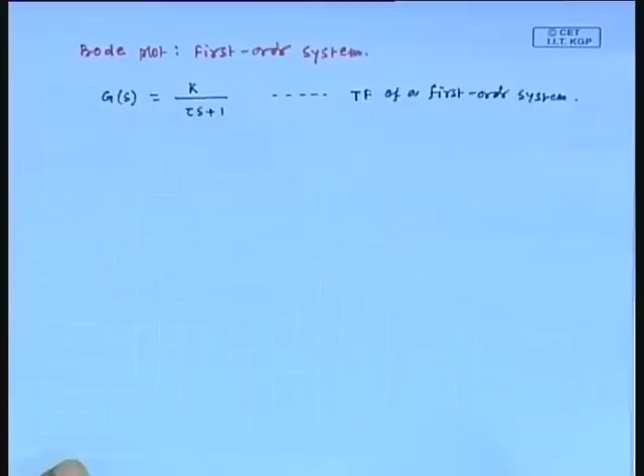Now, we obtained the expressions for amplitude ratio and phi in the previous class as amplitude ratio equals k divided by root over of 1 plus tau square omega square, and we obtained the expression for phase angle as phi equals tan inverse minus tau omega.

Now, we will take the logarithm of this amplitude ratio expression on both sides. Then we can write log amplitude ratio by k equals minus half log 1 plus tau square omega square. So, this is the magnitude ratio basically.

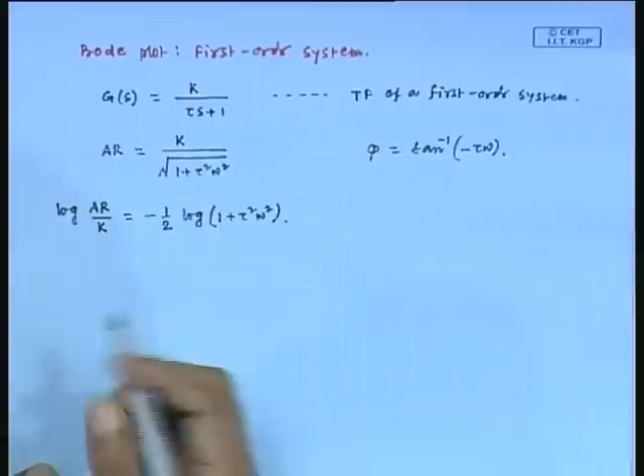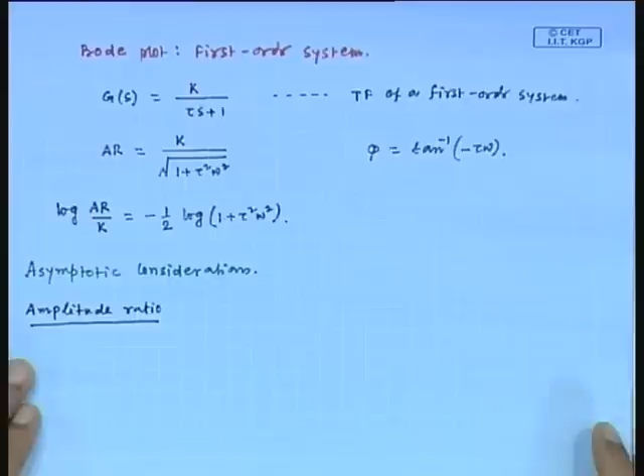Next, we will consider the asymptotic considerations. Before making the plot, we need to discuss the asymptotic considerations. First, we will consider the amplitude ratio, then we will discuss the phase angle.

Now, if we consider tau omega tends to 0, then amplitude ratio by k tends to 1. Here the amplitude ratio is multiplied with 1 by k, that means this is scaled amplitude ratio, and here we are considering scaled omega, I mean tau omega we are considering.

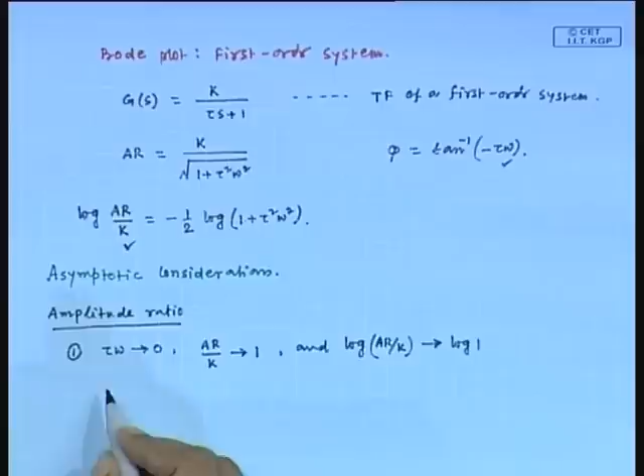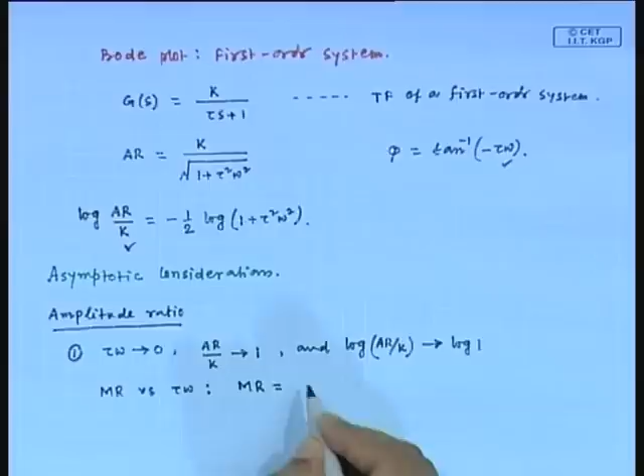So, we can write that log amplitude ratio by k tends to log 1. So, at the very low frequencies, the log plot of magnitude ratio versus tau omega tends to a horizontal line represented by magnitude ratio equals amplitude ratio by k equals 1.

Since this situation arises at low frequencies, this line is called low frequency asymptote.

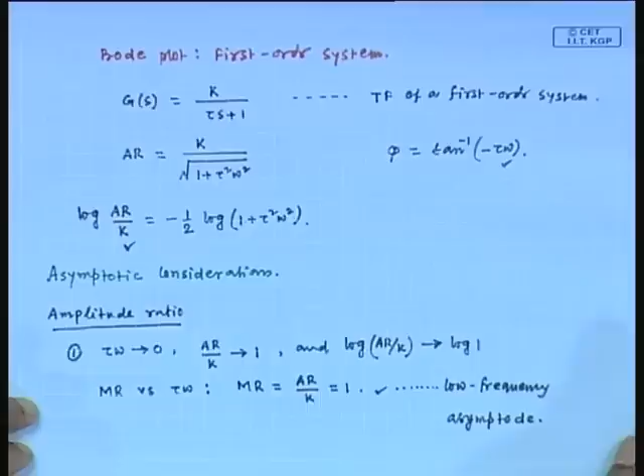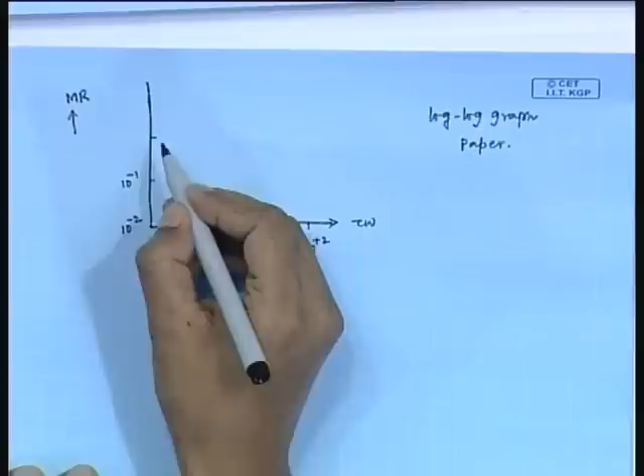This is 10 to the power minus 2, 10 to the power minus 1, 1, 10, and this is suppose 10 to the power plus 2. And here we are considering 10 to the power minus 2, 10 to the power minus 1, then suppose this is 1.

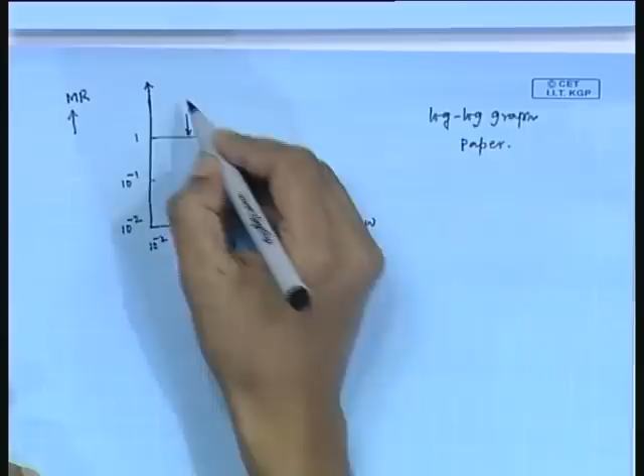Now, we obtained this form, log amplitude ratio by k approximately equal to log 1 when you consider low frequencies. That means it is clearly a horizontal line. So, this is the low frequency asymptote.

Now, under asymptotic consideration, next we will consider tau omega tends to infinity. As tau omega tends to infinity, then we can write log amplitude ratio by k tends to minus log tau omega.

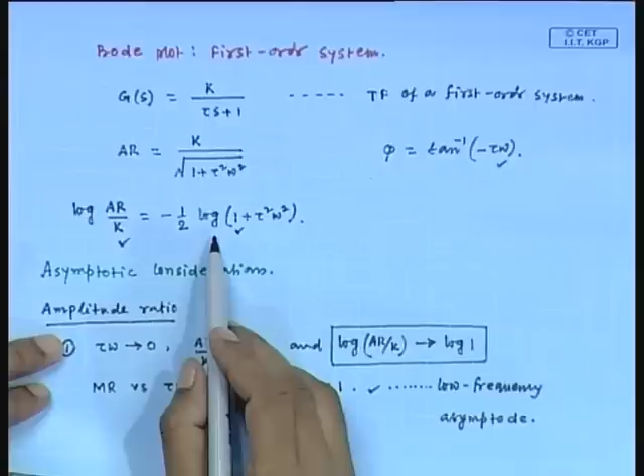When tau omega is much greater than 1, we can neglect this one term. I mean, this is the general form. When tau omega tends to infinity, we can neglect this 1. That means the right hand side becomes minus log tau omega. Agree?

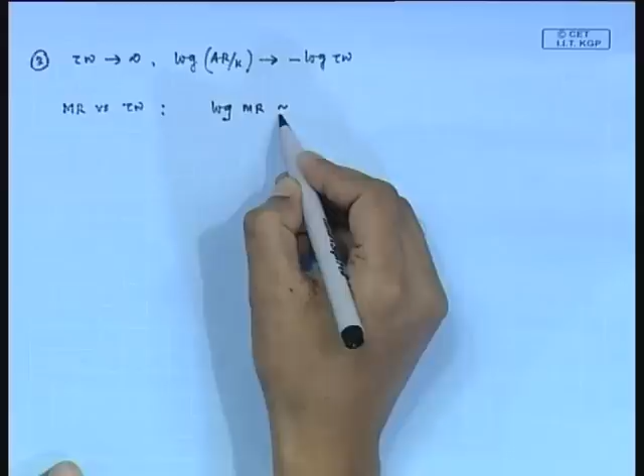So, when tau omega tends to infinity, we can write log amplitude ratio by k tends to minus log tau omega. So, the log plot of magnitude ratio versus tau omega tends to the line represented by log magnitude ratio approximately equal to minus log tau omega.

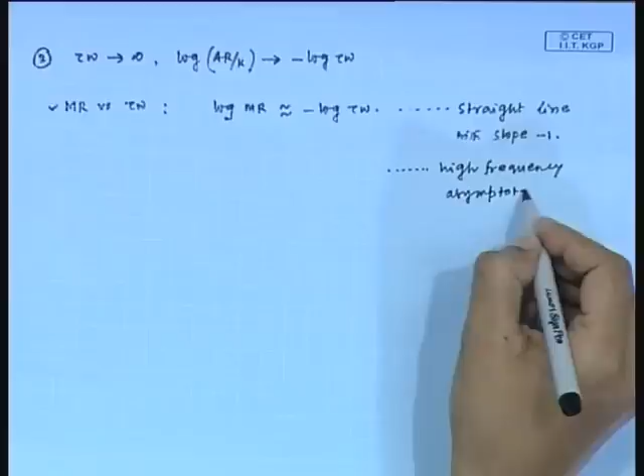This is nothing but a straight line with slope -1, and this situation arises at high frequencies. Therefore, this straight line is called the high frequency asymptote.

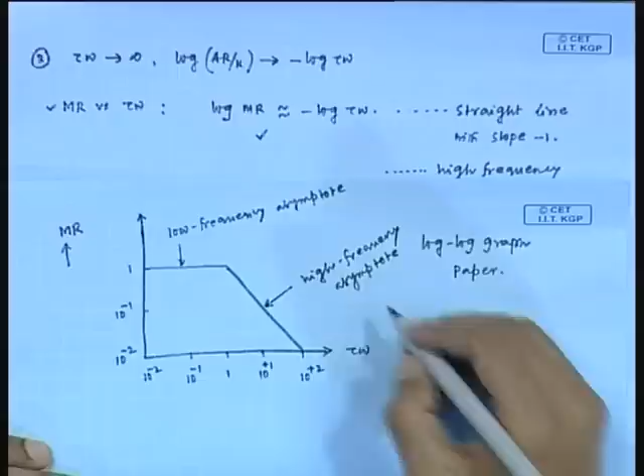So, we will next consider this equation in the Bode plot. It is basically a straight line with slope -1. So, this is representing the high frequency asymptote. It has a slope of -1.

In the next step, we need to determine the point of intersection. In the third step, we need to determine the point at which the two asymptotes intersect.

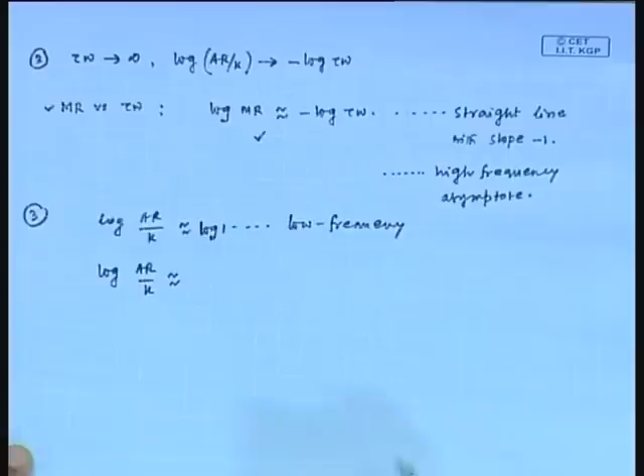When we consider tau omega tends to 0, we got log amplitude ratio by k is nearly equal to log 1. This we considered the low frequency asymptote. When we consider tau omega tends to infinity, we got log amplitude ratio by k, which is approximately equal to minus log tau omega.

Now, if we equate these two equations, we obtain tau omega equals 1. Agree? Equating these two equations, this one and this one, we obtain tau omega equals 1. That means they intersect at tau omega equals 1.

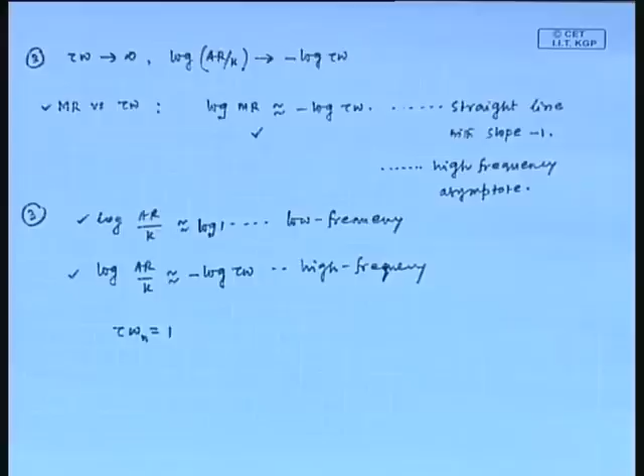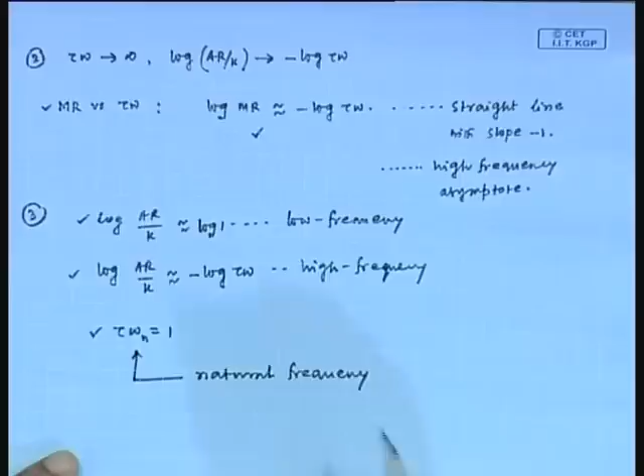Now, in this situation, we usually use one suffix for this omega, that is n. At this situation, we use the suffix n for omega, so we can write tau omega n equals 1. The value of omega at which these two asymptotes intersect is called the natural frequency. So, omega n is the natural frequency. Most popularly it is called the corner frequency, also called the break frequency.

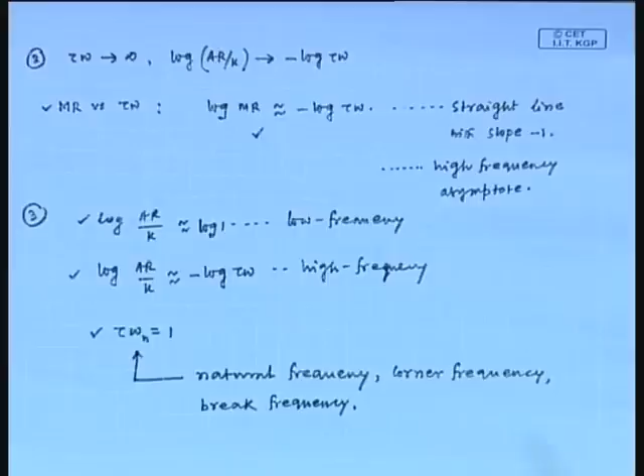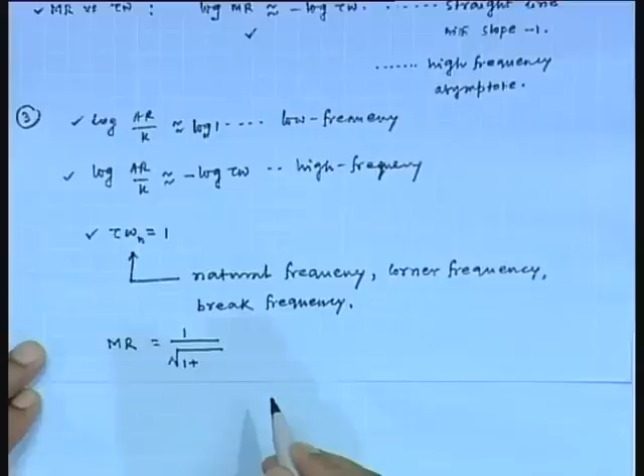Now, can we determine the exact value of the magnitude ratio at this corner frequency? We have the expression of magnitude ratio, that is magnitude ratio equals 1 divided by root over of 1 plus tau square omega square. So, this is the exact value of magnitude ratio at corner frequency.

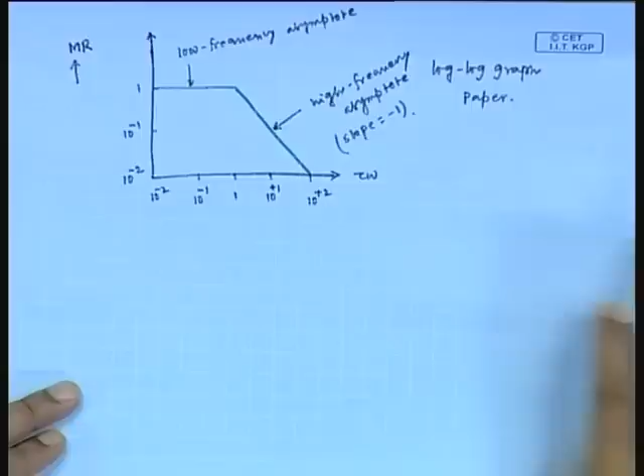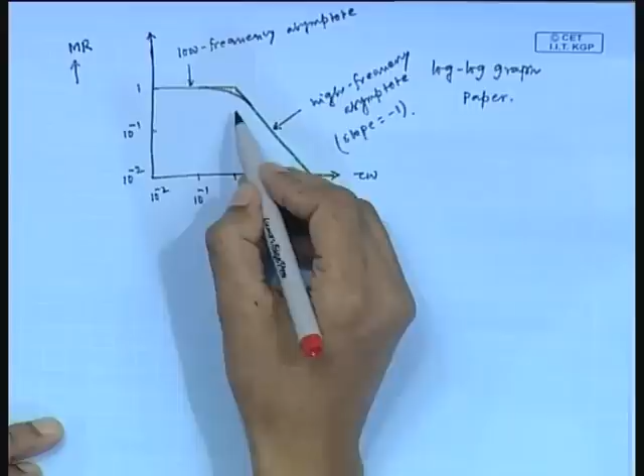Accordingly, we need to construct the Bode diagrams. This magnitude ratio versus tau omega plot should look like this, and the corresponding tau omega is 1 here, which is the corresponding natural frequency in this first plot. So, this is the asymptotic consideration in terms of amplitude ratio, and we obtained this plot.

Similarly, we need to consider the asymptotic consideration in terms of phase angle. So next we will consider the phase angle. As tau omega tends to 0, phi tends to what? 0.

In the second case, as tau omega tends to infinity, how much is phi? Minus 90, that means phi tends to minus 90. So, phi never goes less than minus 90. It clearly indicates that phi never be less than minus 90.

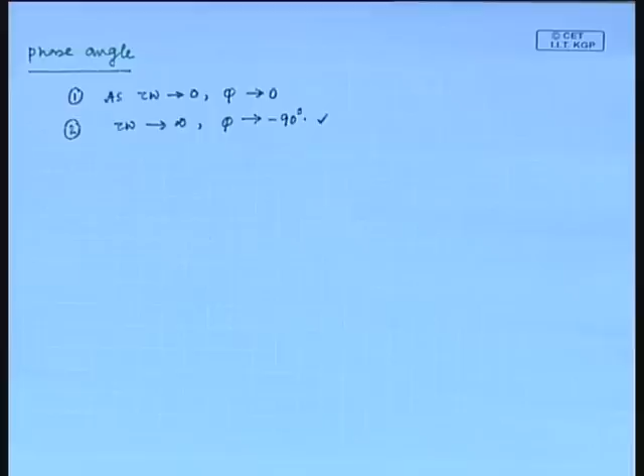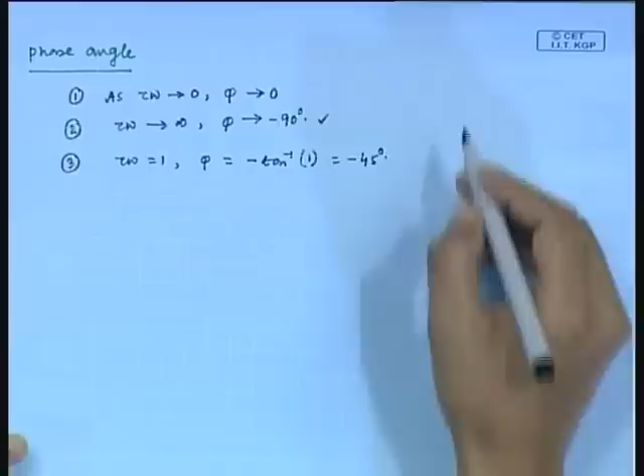And in the third situation, we will consider the corner frequency. At the corner frequency, that means tau omega equals 1, how much is phi? Phi is minus 45, minus tan inverse 1. So, this is minus 45. These are the asymptotic considerations in terms of phase angle.

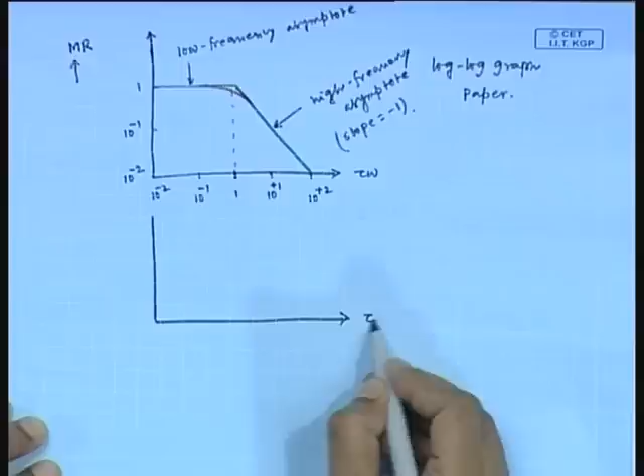Now, we will draw the phi versus log tau omega plot. This is the semi-log graph paper, and this is 1, which corresponds to the corner frequency: 10 to the power minus 2, 10 to the power minus 1, this is 10 to the power plus 1 and 10 to the power plus 2. This is, suppose, minus 100 degree, minus 90 degree, this is say minus 45 degree, this is say 0 degree.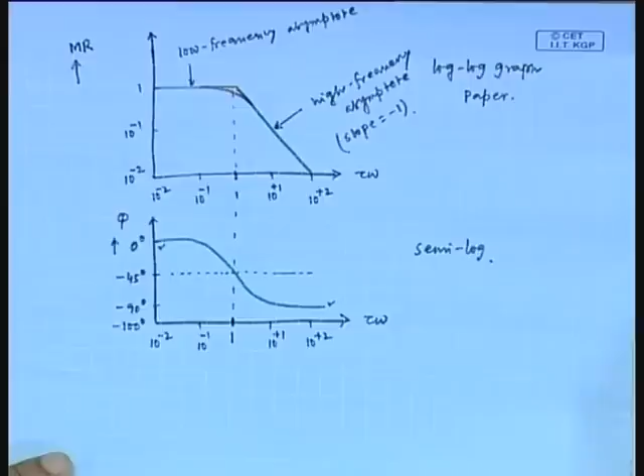At low frequencies, the phi is 0. So, it is somewhat like this. At low frequencies phi is 0, and when tau omega tends to infinity we obtain phi minus 90, and when tau omega equals 1 we obtain minus 45. Agree? At low frequencies this phi is near to 0, and as tau omega tends to infinity this is minus 90, and at corner frequency this is minus 45. So, this is the Bode plot for a first order system.

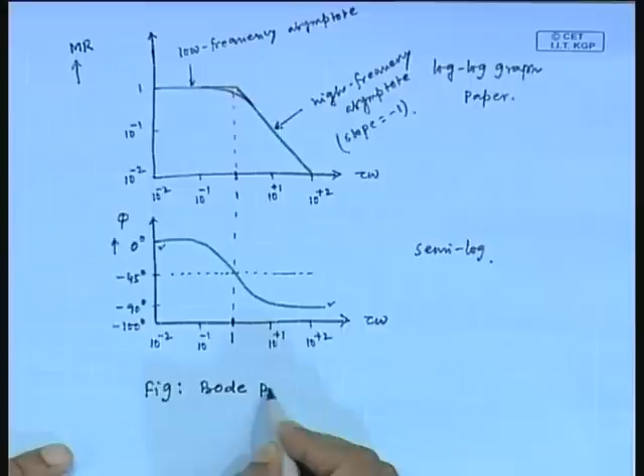This is the Bode plot of a first order system. Next we will discuss the construction of Bode plot for a second order system. In the next we will discuss the Bode plot of a second order system.

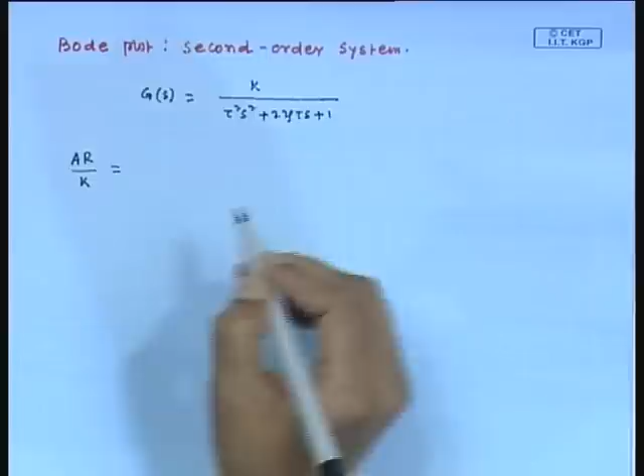So, the transfer function of a second order system we considered earlier takes this form: Gs equals k divided by tau square s square plus 2 zeta tau s plus 1. And in the last class we derived the expressions for amplitude ratio and phi. So amplitude ratio divided by k equals 1 divided by root over of 1 minus tau square omega square whole square plus 2 zeta tau omega whole square. This expression we derived earlier.

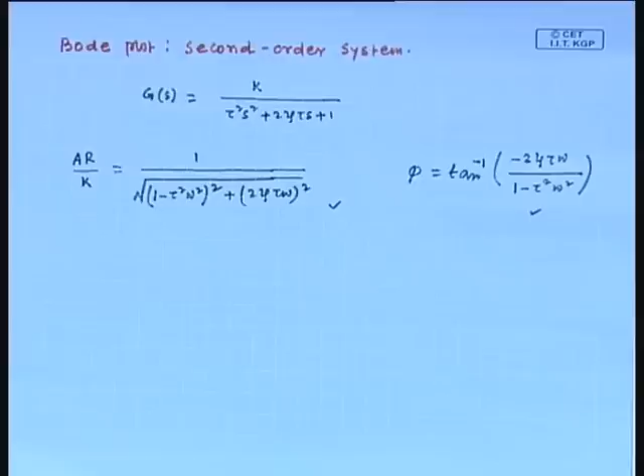Similarly, the expression of phi is written as tan inverse of minus 2 zeta tau omega divided by 1 minus tau square omega square. These two expressions we derived earlier. Now we will discuss the asymptotic considerations in terms of first amplitude ratio followed by phase angle.

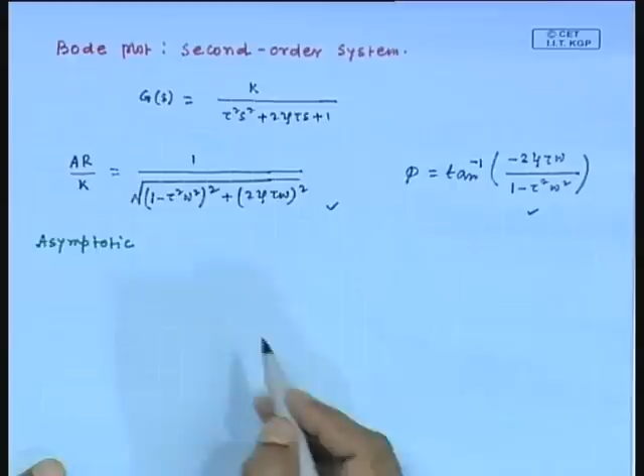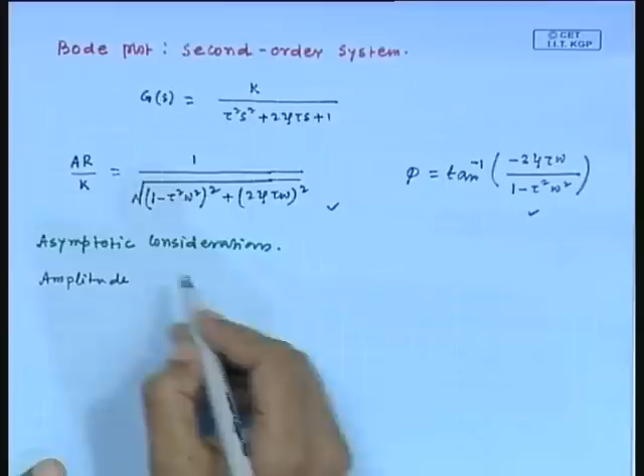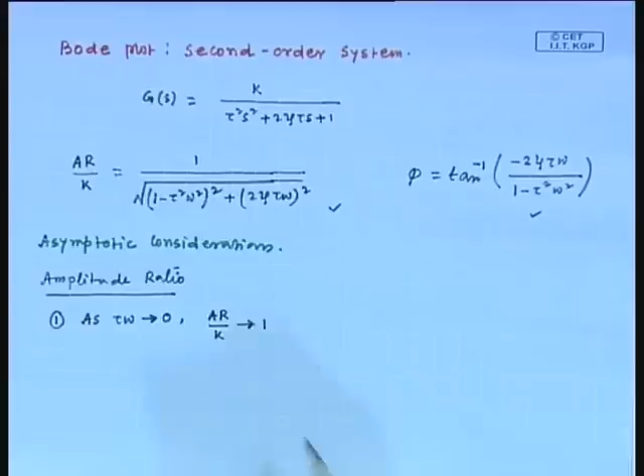Asymptotic considerations. First we will consider amplitude ratio. As tau omega tends to 0, amplitude ratio by k tends to 1, and log amplitude ratio by k tends to log 1. As tau omega tends to 0, we obtain amplitude ratio by k tends to 1, and accordingly log amplitude ratio by k tends to log 1.

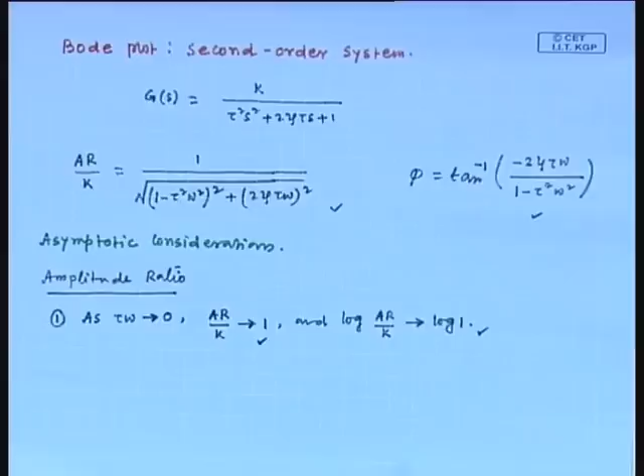Now, it is clear that the low frequency asymptote is a horizontal line. It clearly says that this is a horizontal line.

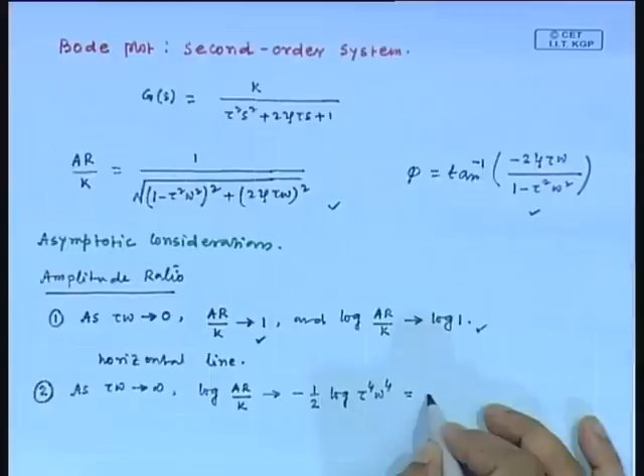Next we will consider tau omega tends to infinity. So, as tau omega tends to infinity, log amplitude ratio by k tends to minus half log tau to the power 4 omega to the power 4. Here we neglect all lower order terms. So, this is equal to basically minus 2 log tau omega. As we consider tau omega tends to infinity, we obtain log amplitude ratio by k tends to minus half log tau to the power 4 omega to the power 4, where all lower order terms have been neglected. So, it then becomes minus 2 log tau omega. So, this is a straight line with slope minus 2.

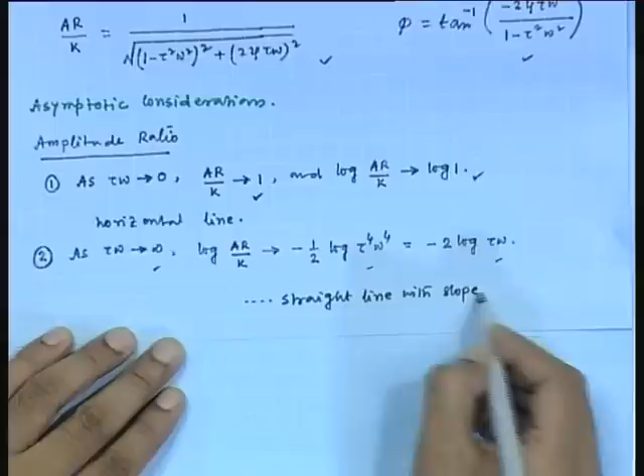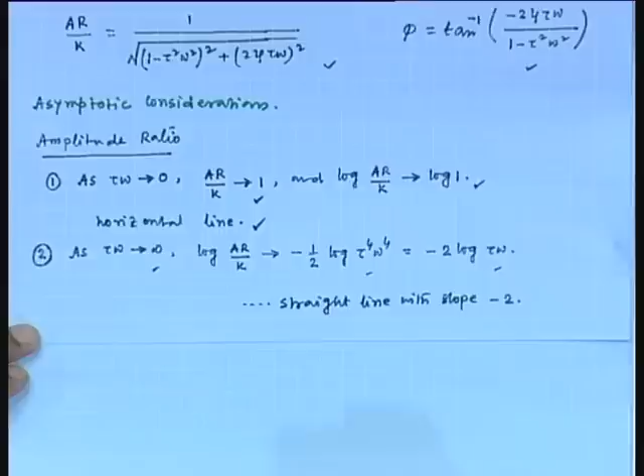So this is a straight line with slope minus 2. The low frequency asymptote is a horizontal line, and the high frequency asymptote is a straight line with slope minus 2. For the first order system, we obtained a horizontal line as low frequency asymptote, but the high frequency asymptote is a straight line with slope minus 1, and for second order system the slope is minus 2.

Now we can produce the plot of magnitude ratio versus tau omega. Before that, we need to determine the point of intersection. This is the third step.

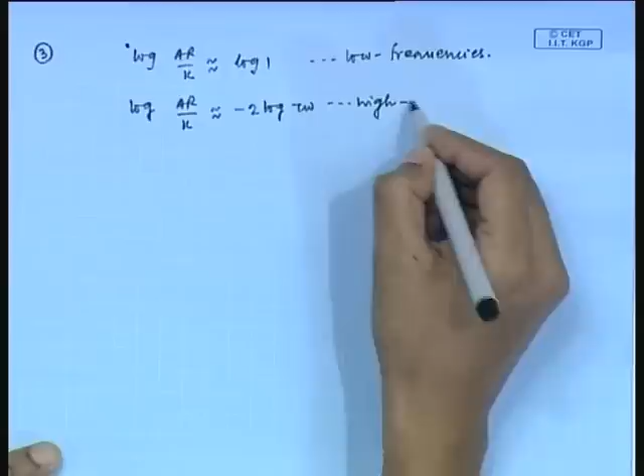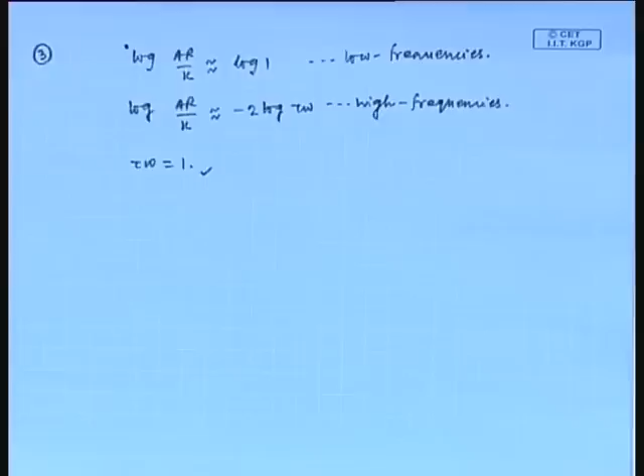So we got basically log amplitude ratio by k, which is approximately equal to log 1. This equation we obtain at low frequencies, and for high frequencies we obtain minus 2 log tau omega. Equating these two equations we obtain again tau omega equals 1. But here we cannot determine the exact values of magnitude ratio, because that is also a function of zeta. Here the exact value at corner frequency we can obtain only knowing the value of zeta.

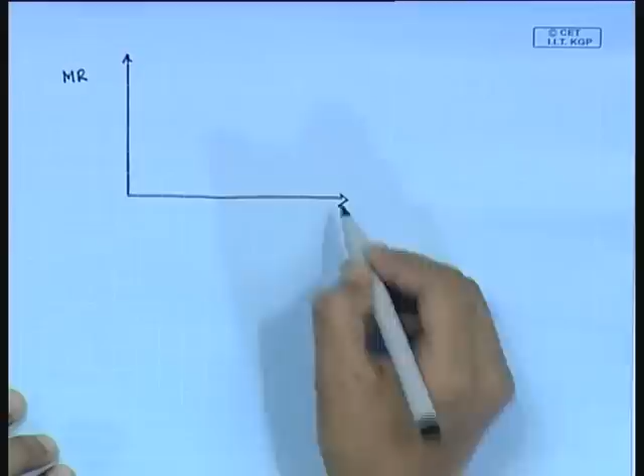So here the magnitude ratio can be obtained by knowing the value of zeta, and this should be reflected in the Bode plot. Next we will construct the Bode plot, and first we consider magnitude ratio versus tau omega.

Say this is 0.1, then 1, and this is 10. 0.01 is the starting value of magnitude ratio, next one is 1, and this is 100. So at low frequencies we obtained a horizontal line, and at high frequencies we obtained a straight line with slope minus 2.

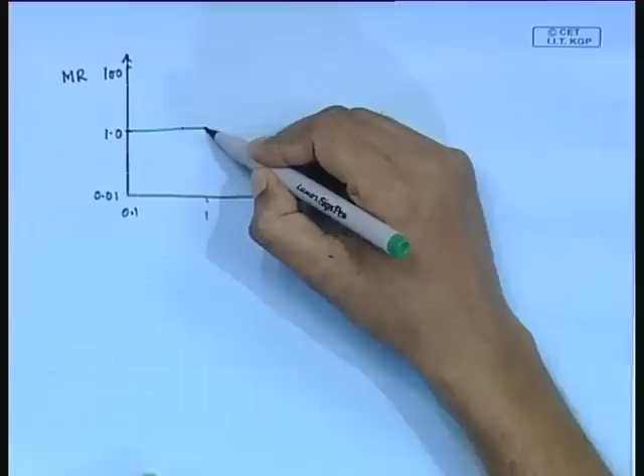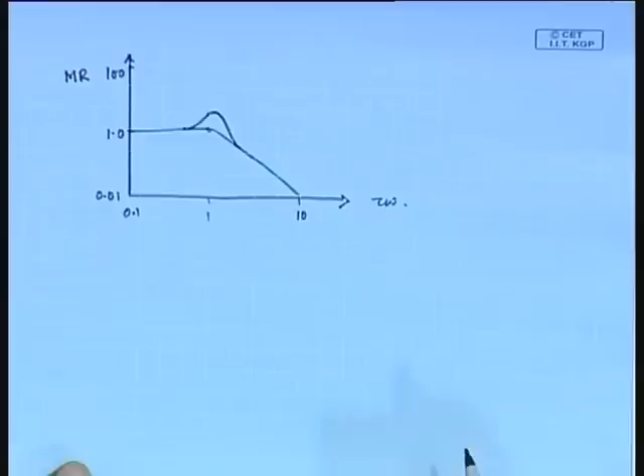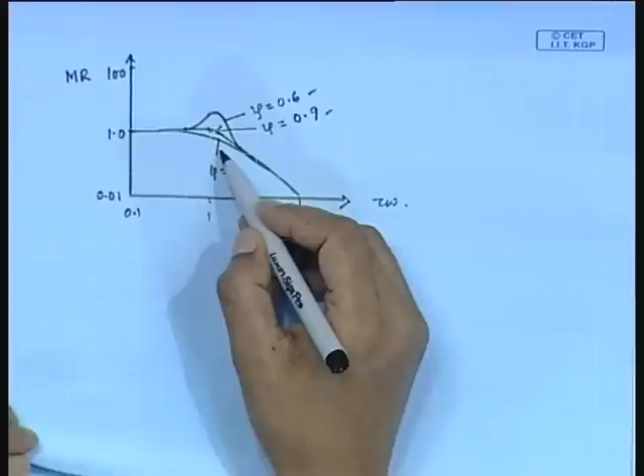It was mentioned that the magnitude ratio at the point of intersection depends on the value of zeta. So accordingly we will consider 3 different cases varying the zeta values. This type of response we obtain if zeta is say 0.6, which is quite less. This one we obtain when zeta is say 0.9, and this plot we obtained when zeta is 1. Considering 3 different values of zeta, we obtained 3 different plots of magnitude ratio versus tau omega. So these are the 3 plots. This top one corresponds to zeta equals 0.6, next one corresponds to zeta equals 0.9, and this bottommost one corresponds to zeta equals 1.

Next we will discuss the asymptotic considerations in terms of phase angle. When tau omega tends to 0, we can write phi equals tan inverse minus 2 zeta tau omega. Can we write this? This we can write when tau omega becomes much less than unity.

Now if we consider tau omega tends to 0, this phi approaches 0. If tau omega is much less than 1, we can write the phi expression like this, tan inverse minus 2 zeta tau omega. Now if we consider tau omega tends to 0, the phi approaches 0.

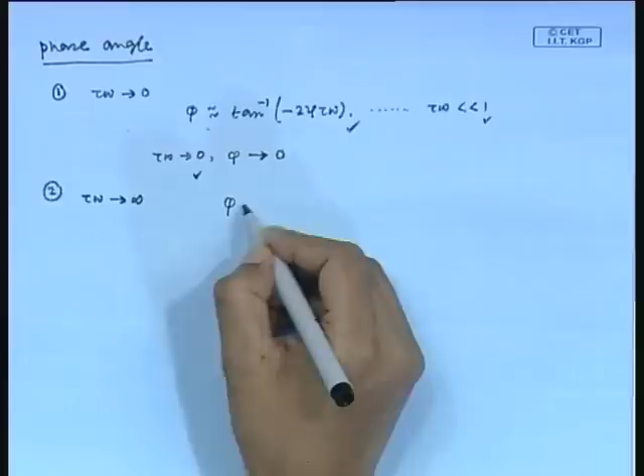Secondly, if we consider tau omega tends to infinity, in this case we can write the phi expression as tan inverse minus 2 zeta tau omega divided by 1 minus tau square omega square. This is the original expression. We can write this as tan inverse minus 2 zeta divided by 1 by tau omega minus tau omega. So this is equal to tan inverse 2 zeta by tau omega when we consider tau omega tends to infinity. So this one we can write in this form considering tau omega tends to infinity.

So then phi tends to tan inverse 2 zeta by tau omega, which is equal to tan inverse 0. This expression we got. Now we are considering tau omega tends to infinity, so we can write tan inverse 0, and this is equal to minus 180 degrees. This is considered as minus 180.

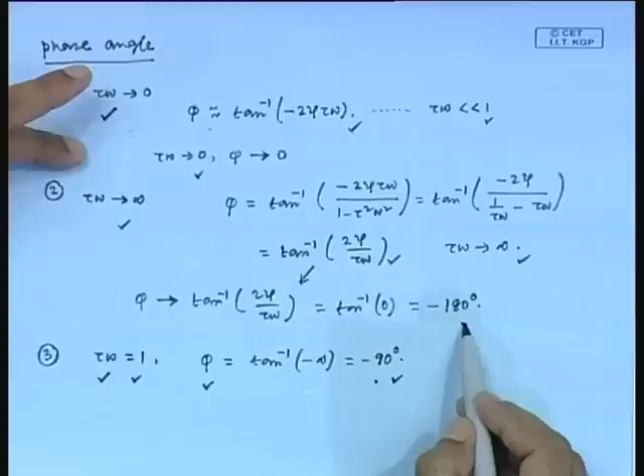Now you see, initially we consider tau omega tends to 0 and this is tau omega equals 1. So this is the lowest one, this is the intermediate one and this is the highest one. Here the phi value is maximum, this is intermediate and this is minimum. So there is a trend in the Bode plot.

Now we will try to produce the plot between phi versus tau omega. And this is phi: 0.1, this is indicating 1 and this is 10. This is suppose minus 200 degrees, minus 180 degrees, minus 90 degrees, 0 degrees. This plot also considers the different values of zeta. This is one plot.

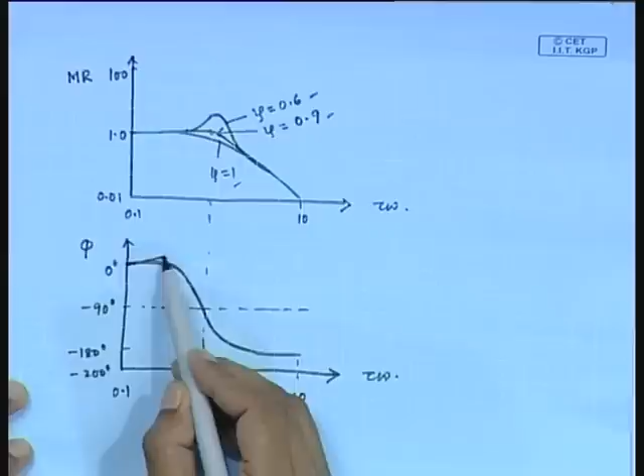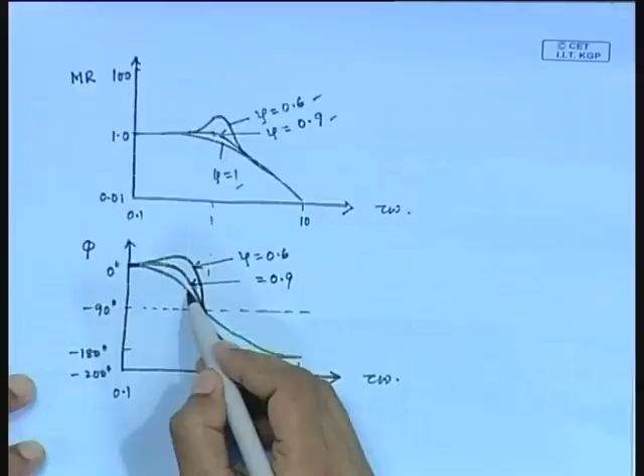This is the second plot, and this is the third plot. The top one we obtain for zeta 0.6. The intermediate one we obtain considering zeta 0.9, and this one we obtained considering zeta equals 1.

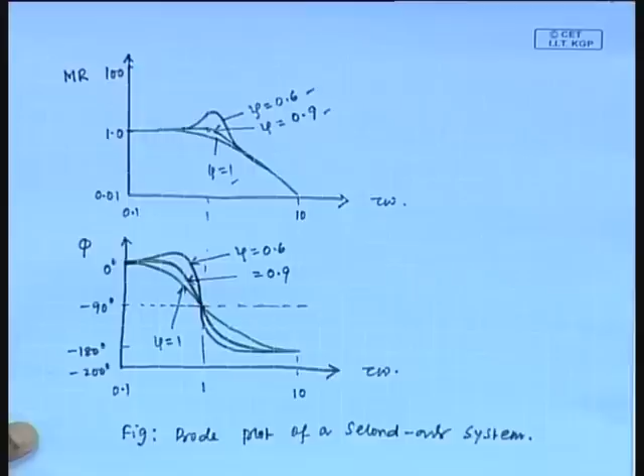So this is the Bode plot of a second order system. The top one is plotted using log graph paper, and the bottom one is obtained considering semi-log graph paper.

In the last example, we will consider a feedback control system, a feedback controller, and we will construct the Bode plot. So next we wish to discuss the construction of the Bode plot for a P only controller.

The transfer function of a P only controller is Gc equals Kc. So we can write amplitude ratio equals Kc, and the phase angle we can write as phi equals 0. So both are independent of omega, so it is easy to develop the Bode plot.

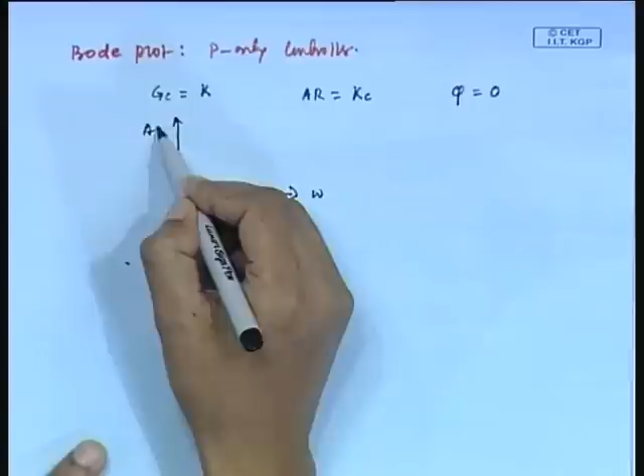This is indicating omega and this is indicating amplitude ratio. Since Kc is independent of omega, this should be a straight line. In the bottom plot, we consider phi versus omega, and phi remains 0 at all times - that is also a horizontal line having phi 0 degree. So this is the Bode plot of a P only controller.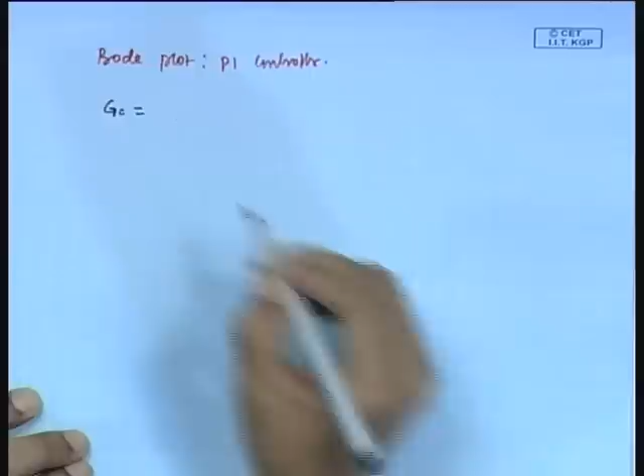Next is the PI controller. The PI controller has the transfer function and it can be written as Gc equals Kc times 1 plus 1 divided by tau I s.

Replacing S by j omega, we can write the frequency response transfer function as Kc multiplied by 1 plus 1 divided by j tau I omega. We can write this as Kc times 1 minus j divided by tau I omega. Agree?

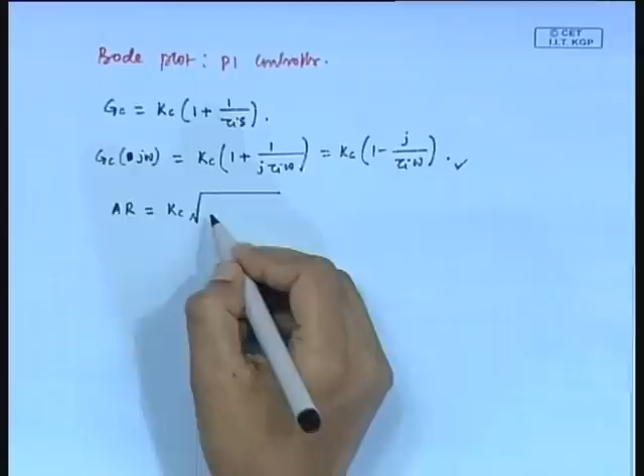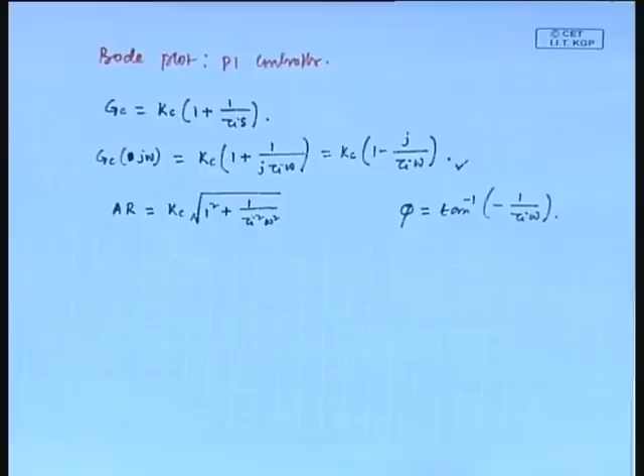So from this Cartesian form it is straightforward to determine the expressions for amplitude ratio and phi. Amplitude ratio we obtain as Kc times root over of 1 squared plus 1 divided by tau I squared omega squared. Similarly, we can write phi equals tan inverse of minus 1 divided by tau I omega.

Now we can write this expression for amplitude ratio by taking the logarithm as log of amplitude ratio by Kc equals half log of 1 plus 1 divided by tau I omega whole square, which is log amplitude ratio by Kc equals half log of 1 plus 1 divided by tau I squared omega squared.

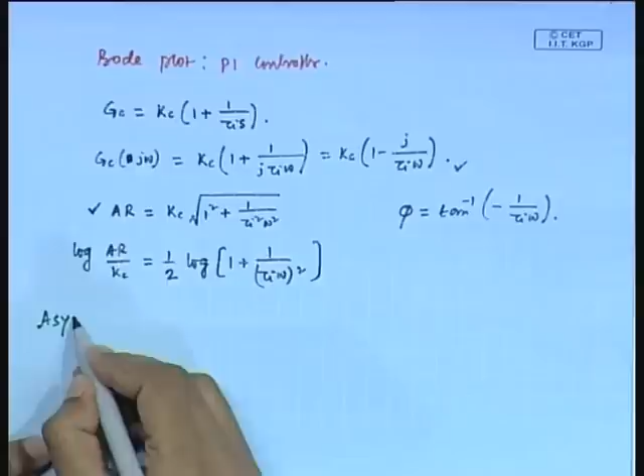Next we consider the asymptotic considerations. First we consider the amplitude ratio.

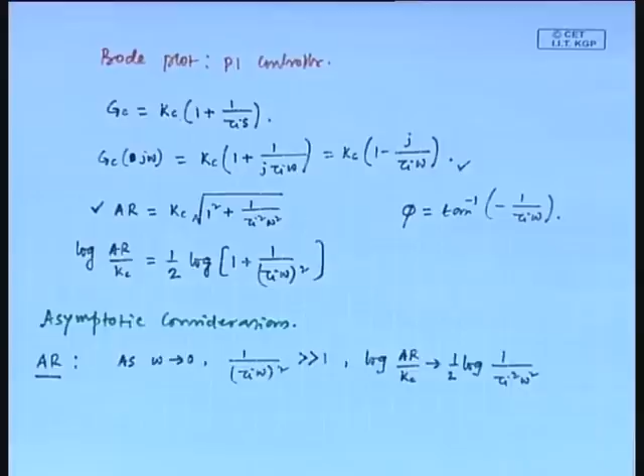As omega tends to 0, 1 by tau I omega whole square becomes much higher than 1. So we can write log amplitude ratio by Kc tends to half log of 1 by tau I squared omega squared, which is equal to minus log of tau I omega.

If we consider omega tends to 0, we can say that 1 by tau I squared omega squared is much higher than 1, then this expression yields this. So the low frequency asymptote is a straight line with slope minus 1.

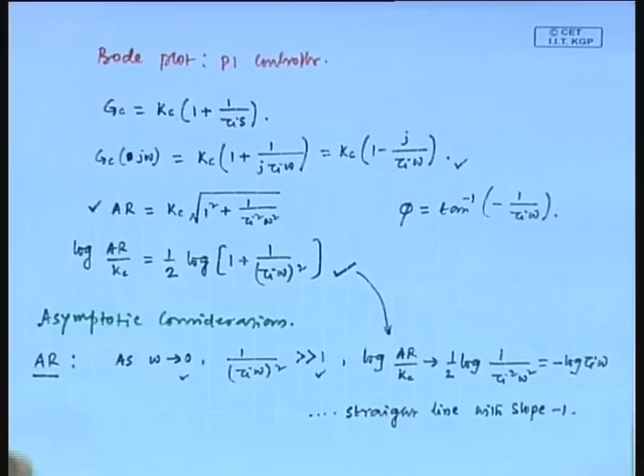So what will be phi then if we consider omega tends to 0? Phi becomes tan inverse of minus infinity, which is equal to minus 90 degrees.

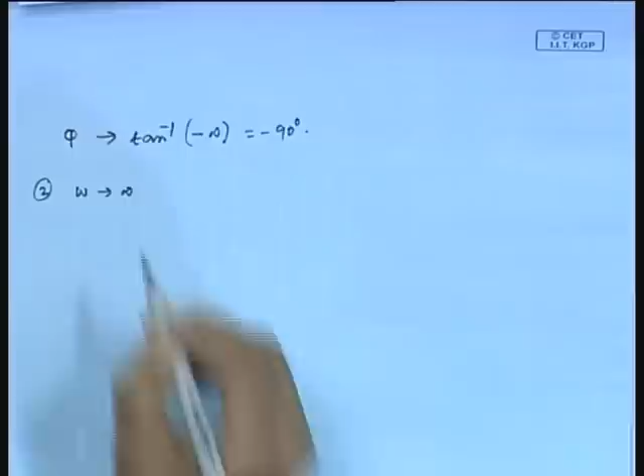It is very straightforward because we have this expression, we are just considering omega tends to 0. In the next step we will consider omega tends to infinity. Then 1 by tau I squared omega squared approaches 0. Accordingly, we can write log amplitude ratio by Kc tends to log 1. So at high frequency, the high frequency asymptote is a horizontal line.

High frequency asymptote is a horizontal line. And how much is phi if omega tends to infinity? Phi becomes 0 degree.

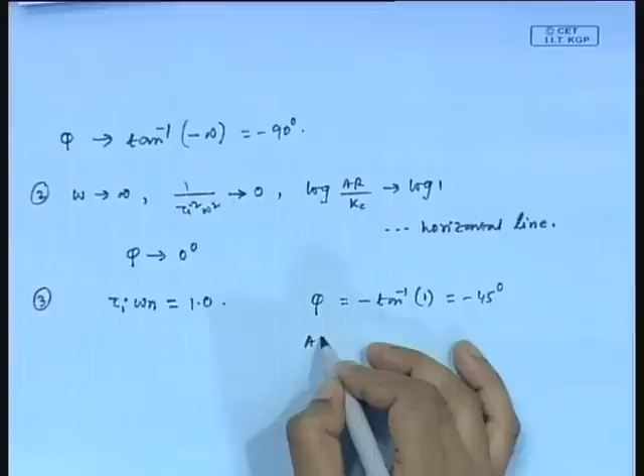Next one is the determination of corner frequency. We obtain the corner frequency when tau I omega n equals 1.0. Accordingly, phi becomes minus tan inverse 1, which yields minus 45 degree. And amplitude ratio by Kc becomes root 2, which is 1.414.

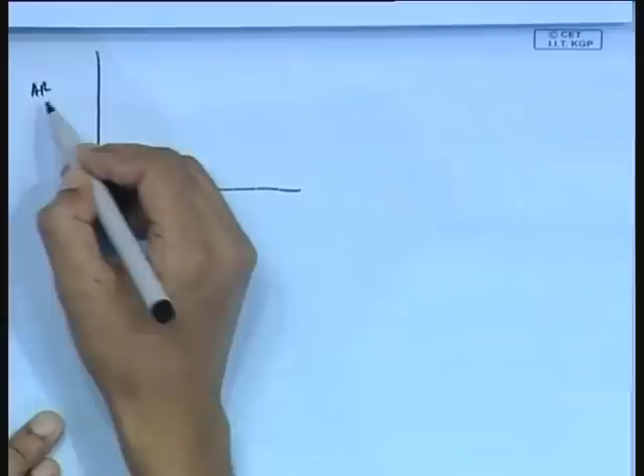So these are the asymptotic considerations, and next we will make the plot. Amplitude ratio by Kc, and next one is phi versus tau I omega.

So when omega tends to 0, we obtained a straight line with slope minus 1, somewhat like this, and this is indicating the corner frequency. And when omega tends to infinity, this is a straight line like this. So we get this type of Bode plot.

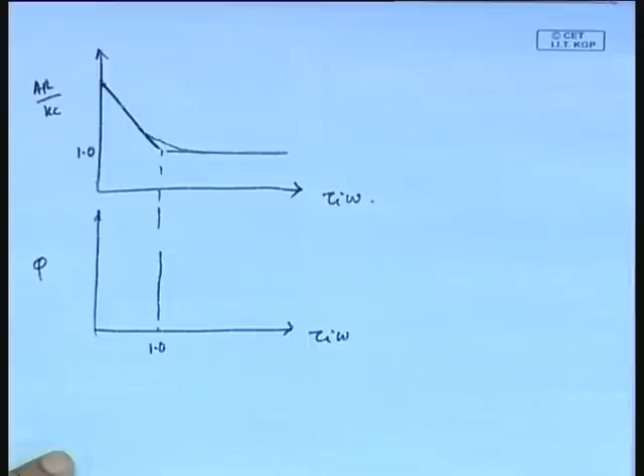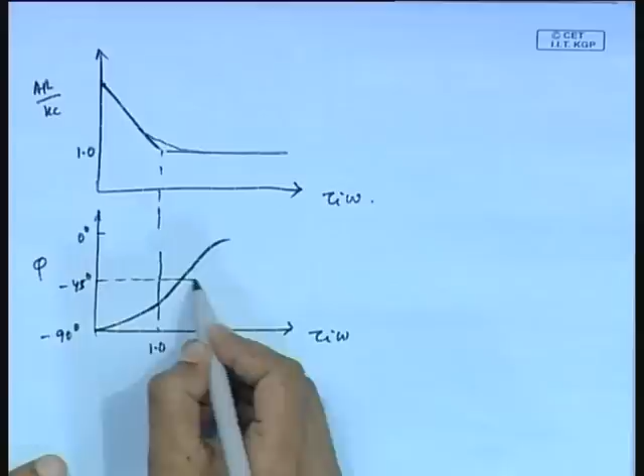Similarly, here we obtained minus 90, we obtain like this plot for phi versus tau I omega. Yeah, this should be like this, this is minus 45. Okay, I am redrawing it.

Tau I omega, this is suppose 1, this is minus 90 degree. So this is minus 45 and this is 0 degree. So it will go like this. So this is indicating the corner frequency at which phi is minus 45, and at low frequencies this is minus 90, and at high frequencies this is 0.

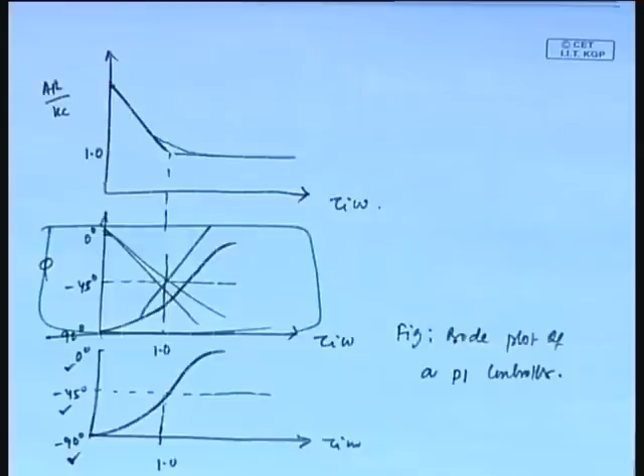So you just do not consider this one. So this is the Bode plot of a PI controller. Okay, thank you.